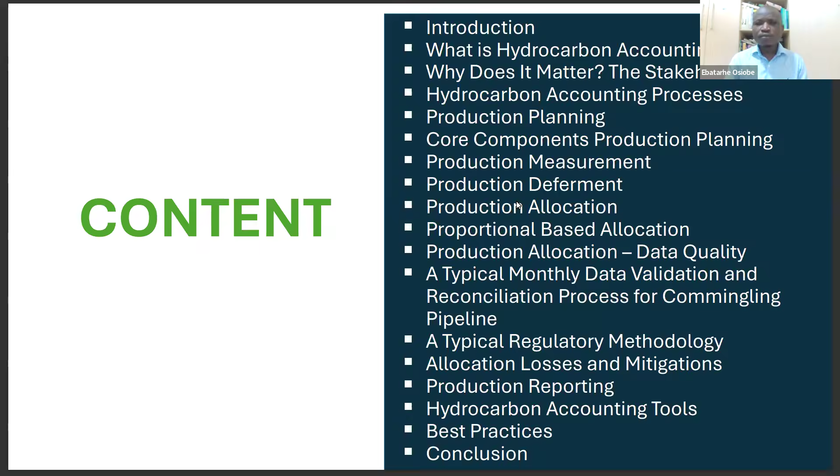So basically, when oil and gas has been drilled and the well is commissioned for production, the well flows through the flow line to a production facility where this oil and gas is processed. It could be two-phase separation or three-phase separation, but in this scenario, we have a three-phase separation. And the desired crude in this scenario flows through a pipeline and goes through a LACT unit, from which it can be trucked, or go to a pipeline that goes to a refinery, which is the midstream and downstream, and also to a trunk line to a terminal for exports.

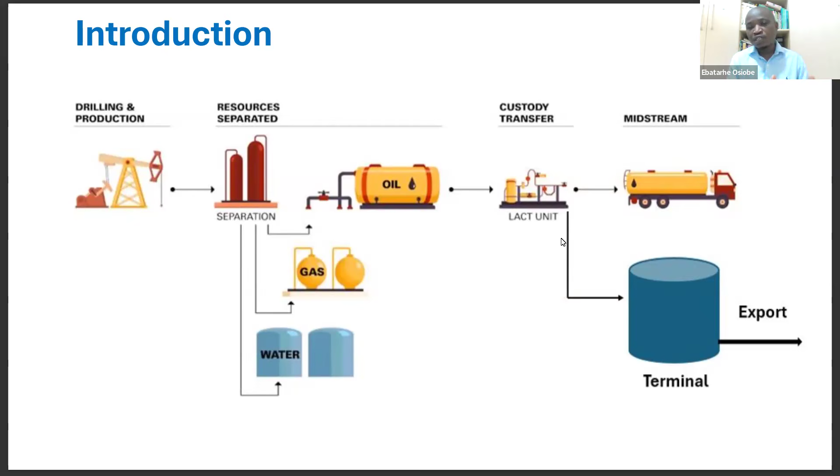And where hydrocarbon accounting comes in is in a commingling situation, where you have more than one operator producing into a particular pipeline or a trunk line. It becomes a complex scenario to know who owns what. And that's where hydrocarbon accounting is very important. So most of my discussion today will be based on a commingling process, because that's where hydrocarbon accounting becomes very complex, and measurement is very key in such a situation.

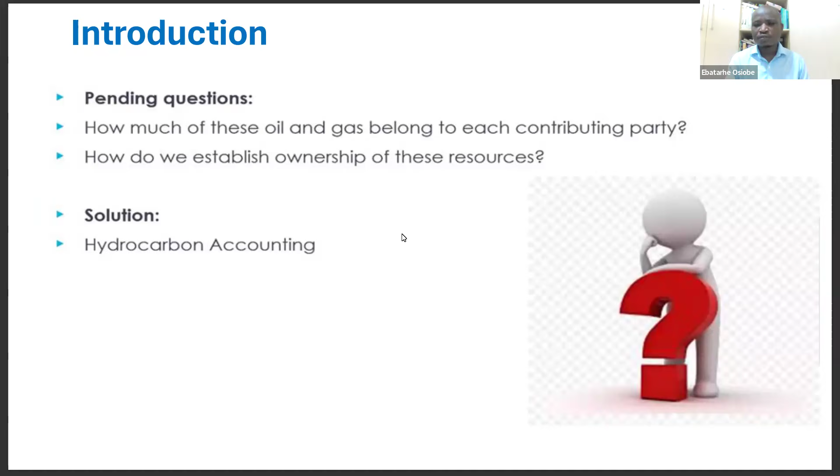So two questions every operator will ask themselves, and even the terminal operator, are how much of this oil and gas actually belongs to each of these contributing parties, and how do we establish the ownership of these resources? And the solution is simply hydrocarbon accounting. And what is hydrocarbon accounting? It is simply tracking oil and gas from the point of production to the point of sales. This is what ensures accurate reporting for revenue, taxation, and regulatory compliance.

And why does it matter? Because it sits at the intersection of legal, engineering, and finance. It comprises production allocation and production planning. It is the cash register of any oil and gas company. It involves reconciliation. It involves production data management and, as I mentioned before, the ownership of this hydrocarbon fluid. It involves tracking the oil and gas from the point of production to the point of sales, which is from your wellhead to your process facility, to the pipeline, to the LACT units, and also to the terminal.

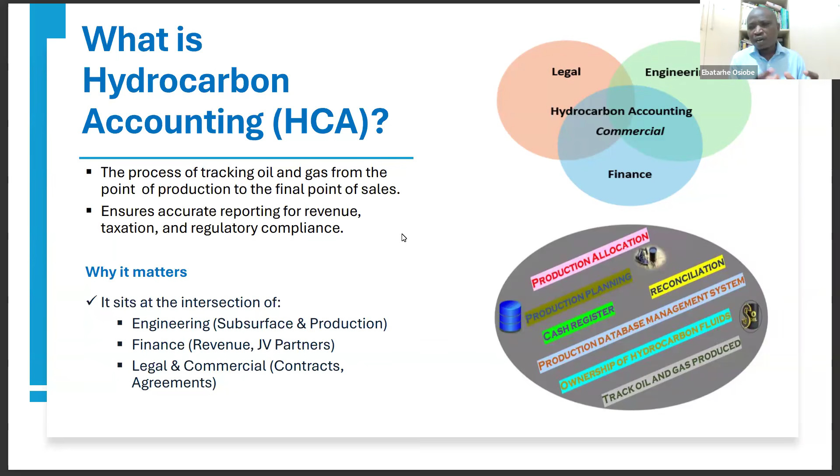In terms of engineering, we look at the subsurface and the surface, which is the production itself. In terms of finance, we look at revenue, JV partners, legal and commercial contracts and agreements, because when it comes to a commingling situation, there has to be alignment, there have to be agreements on certain contracts, your CHA and your CTA. So these are some of the things that make up hydrocarbon accounting, and why hydrocarbon accounting is very, very important.

Who are the stakeholders? Who really cares about getting these numbers right? Because hydrocarbon accounting is all about numbers. Why do we need to get these numbers right? The answer is everyone. The JV partners want to ensure correct revenue distribution between the different parties. The government and regulatory agencies, for royalty calculations, taxation, and production reporting. The investors and shareholders want to know the reserves and how to value the company in terms of financial transparency.

Then for the operator itself, which is the management of the company, for strategic decision making, you have to make informed decisions based on what you are producing, what you need to do and what you don't need to do. In terms of reserve estimation and production forecasting, it's from your hydrocarbon accounting that you can determine your production planning, and also carry out performance analysis. How are you performing? How is your reservoir performing?

How is your production performing? Are you metering well? Are your measurements good? Are there discrepancies in your measurements? What's your allocation? Is what you are producing actually what you are allocated, especially in a commingling situation where you have two or more operators injecting into a particular pipeline? And also for the pipeline and terminal operators, for scheduling, inventory management, and custody transfer.

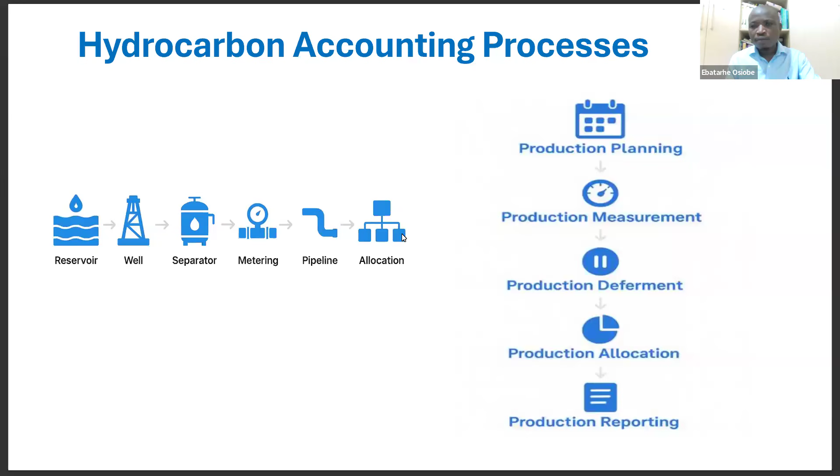When we talk about production planning, what's really production planning? It's the process of forecasting, scheduling, and optimizing oil and gas production to meet business objectives, contractual commitments, and regulatory requirements. Its key objective is to maximize efficiency and minimize downtime, because you need to plan what you want to produce and how you want to produce it. You need to ensure that your equipment uptime is top notch. You need to know when you need to shut down for maintenance, annual or quarterly maintenance. These are some of the things you do during your production planning.

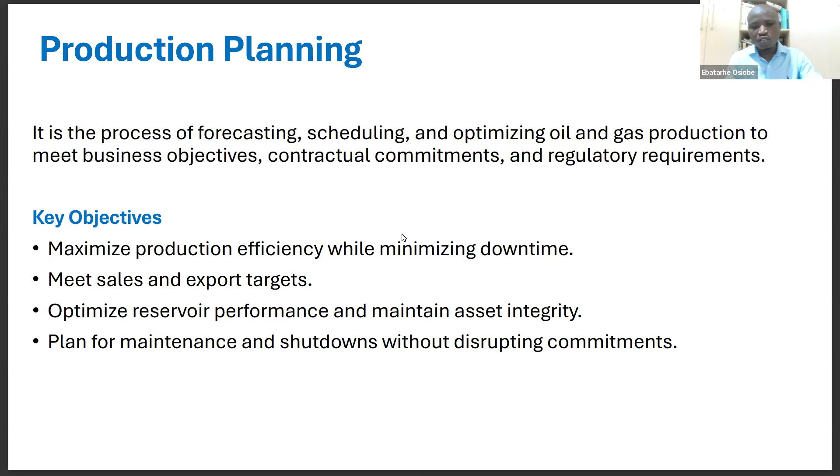And to meet sales and export targets, you have to plan. For example, you're given a target to produce 1 million barrels, and you have to plan how to produce that 1 million barrels efficiently without disrupting your production or your reservoir. You need to optimize your reservoir performance and maintain asset integrity. There's also a plan for maintenance, which I've mentioned, shutdowns without disrupting commitments.

What are the core components of production planning? We have forecasting, scheduling, resource allocation, risk management, and integration. On forecasting, you look at short-term and long-term production volume. You use your reservoir model and historical data to do your forecasting. For scheduling, you look at your daily and monthly production plan, and you have to align it with your pipeline availability and your storage. It all depends on your own production philosophy.

In terms of resource allocation, you look at the wells you are going to produce during that period. You look at your facility and the manpower that is going to operate this process facility. How do you optimize your operators, your separators, your compressors, your pipeline integrity to ensure that your pipeline is available to transport your crude from one point to another? In terms of risk management, you look at uncertainties, like the possible failures within that period of time, so you make a contingency plan to ensure that does not affect you.

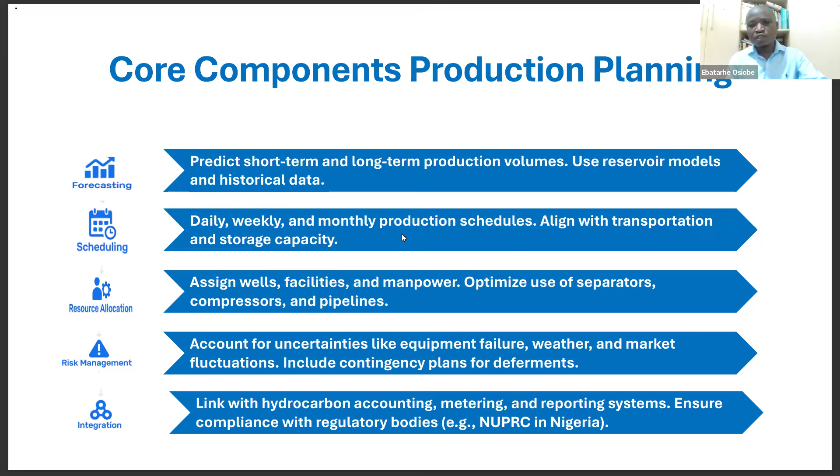In terms of integration, this is where hydrocarbon accounting comes in. The hydrocarbon accounting team comes in, planning your production, your metering, and your reporting to ensure that everything you do is in line with the regulatory body. I mentioned NUPRC here because I'm in Nigeria, and our upstream regulator is the NUPRC, Nigerian Upstream Petroleum Regulatory Commission. They are in charge of regulating the upstream industry in Nigeria.

But choosing your meter for your process facility entails proper study. You need to look at the maximum and minimum flow rate for that facility. You need to look at your fluid properties. Those are some of the things you look at to choose the particular meter and the right meter sizing that fits your production facility. Because if you don't do this study properly, when you start producing, there's a likelihood that you might not have accurate measurement, and you don't want that to happen to your production facility.

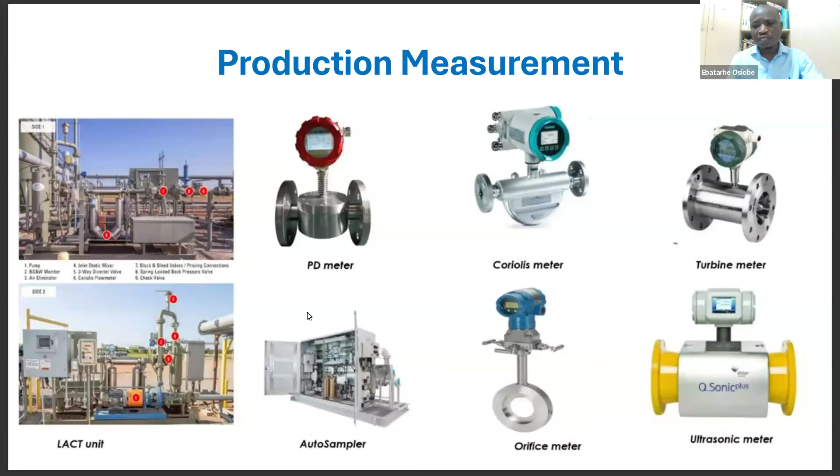Then let's look at what production deferment actually is. I'll just really say it is a reduction in production caused by an activity or breakdown, trip, equipment failure. It could be that your well stopped flowing at a particular time. It could be the breakdown of your pump. It could be the unavailability of your pipeline. That's what production deferment is all about.

In quick terms, you can say production deferment is your integrated production system capacity minus your actual production. Integrated production system capacity means what you can actually produce technically with the availability of all your wells and equipment in place. And when you don't actually produce that, if you subtract your production from your IPSC, you get your deferment, especially when your deferment data is accurate.

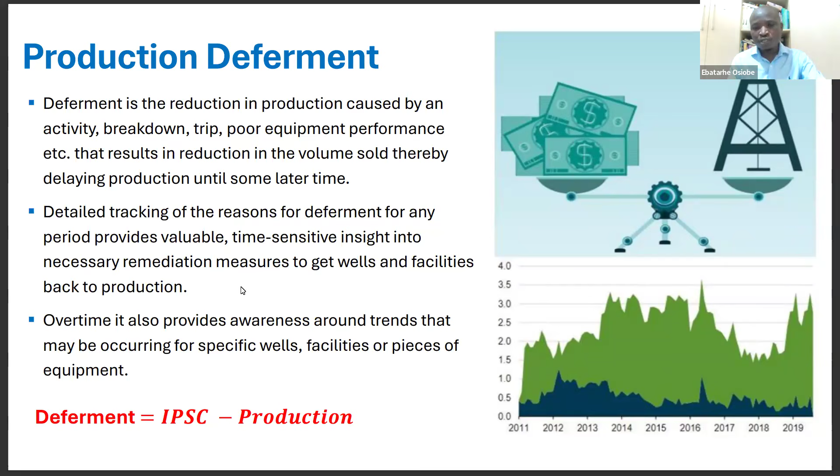So when we talk about production allocation, this is one of the core components in hydrocarbon accounting. Production allocation simply means redistributing the production back to the different contributors. Meaning when you have 1 or 2 producers into a pipeline, they commingle and they produce, and you need to give that production back to these individual producers. Also, allocating your production back to your various fields and your various reservoirs, which is called back allocation. It's just a counterflow process: what was received and what you are distributing back from the main source. That's simply what allocation is all about.

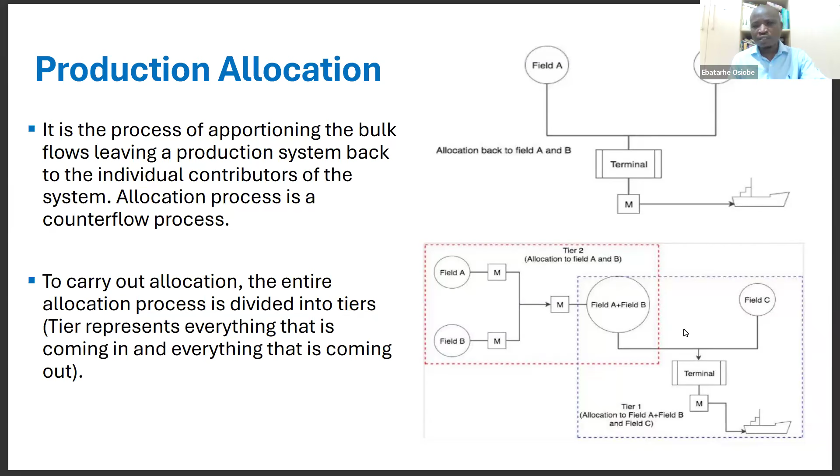In production allocation, we have the fiscal allocation and the field allocation. The fiscal allocation is basically the commercial side of it, while the field allocation has to do with allocation to fields and back allocation to the various wells and reservoirs. Fiscal allocation is apportioning volumes to individual contributor fields based on the agreed methodology. There are agreed methodologies and commercial agreements between each party, and this forms the basis for sales revenue to the owners of that particular field.

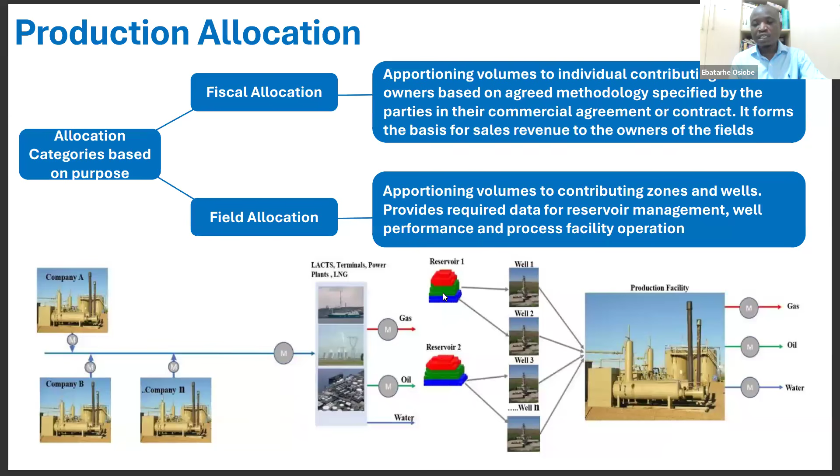The diagram below simply elaborates on what I just said. Here we have company A and company B flowing into a common meter. This is a LACT unit that goes to the terminal for export. On this other side, they have the production facility. Here we have the production meters. From here, it is allocated back to the individual wells and the individual reservoirs. This is basically what allocation is all about.

And we have different types of allocation, but I'll be focusing on proportional based allocation, because it is one of the most commonly used allocation methods in the oil and gas industry. Allocation by difference means when one or two producers are producing into a common pipeline and one has a metering system in place and the other doesn't. So the known volume is used to calculate the unknown volume. That's what allocation by difference is all about.

While equity-based allocation has to do with the equity share of a particular producer. So the allocation is based on the percentage equity they have in that particular asset. Like I mentioned before, proportional based allocation is what I defined in the other slide. And your uncertainty based allocation is based on uncertainty. It has to do with your metering system, your sampling system, your equipment and stuff like that.

This is a very good allocation method, but it has its own complexity, and that's one of the reasons it's not commonly used. It's used in some parts of the world, but it's not commonly used in the oil and gas industry. The common one is the proportional based allocation method.

This is a typical example of the proportional based allocation method. We have Q1 and Q2 flowing into a common metering system. This is our fiscal meter. This is our production meter, or you call it allocation meter. This becomes the reference point for the allocation to either stream 1, stream 2, and stream 3.

This is based on the proportional based allocation. Allocation is a conventional calculation method whereby, distributing the stream to the commingled production, or transportation systems receive shares of output quantity in proportion to their input contribution. So basically, that's what the proportional based allocation method is all about.

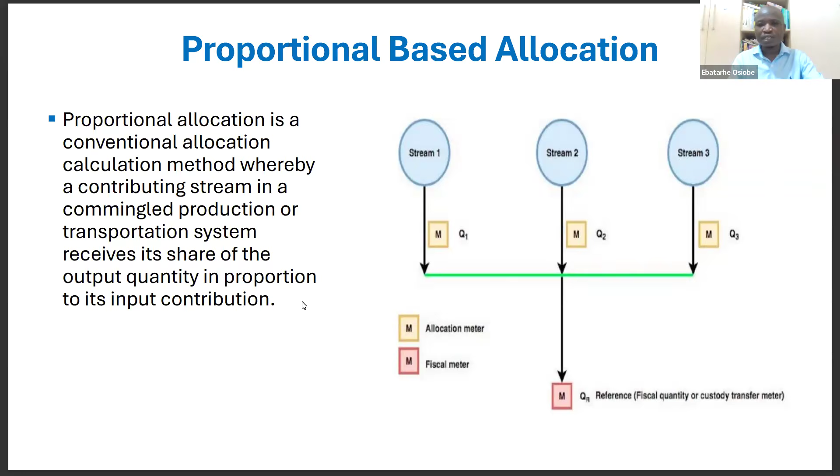Then I'll try to look at data quality for hydrocarbon accounting and allocation. Your data quality increases. The well measurement has the lowest accuracy because many of the companies opt for well test and measurement. They don't use the multi-phase meter or digital method to measure their well fluid. What they basically do is estimated well tests, which is the discontinuous well test method. So that volume is based on estimates.

So because of that, we have lowest accuracy in terms of well measurement, except you have a multi-phase meter for each of your wells to actually know exactly what your well is producing. Then for the station measurement, it's medium accuracy. When you move to the terminal, that's where you have the highest accuracy. But allocation actually takes place from the terminal export, which is the fiscal point of measurement.

So note that in hydrocarbon accounting, fiscal does not refer to measurement accuracy. It simply means that at this point, the value does not change during reconciliation. So this is what the data quality is all about.

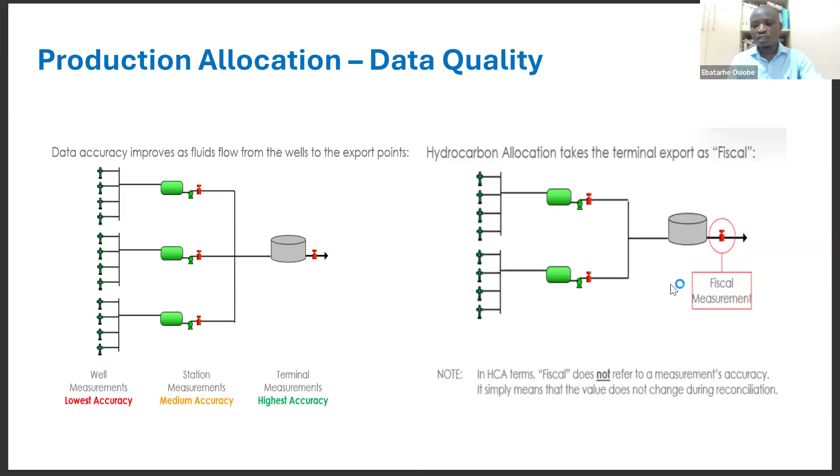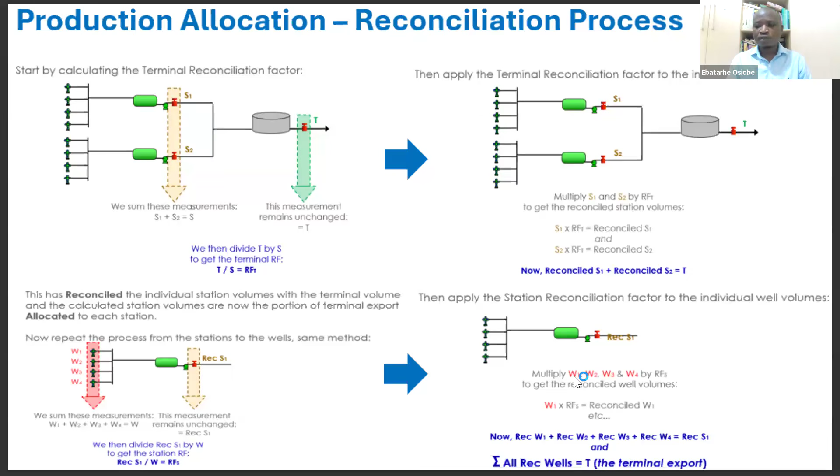And I think in the slides forward, I have a simple illustration of a mathematical calculation of the allocation method.

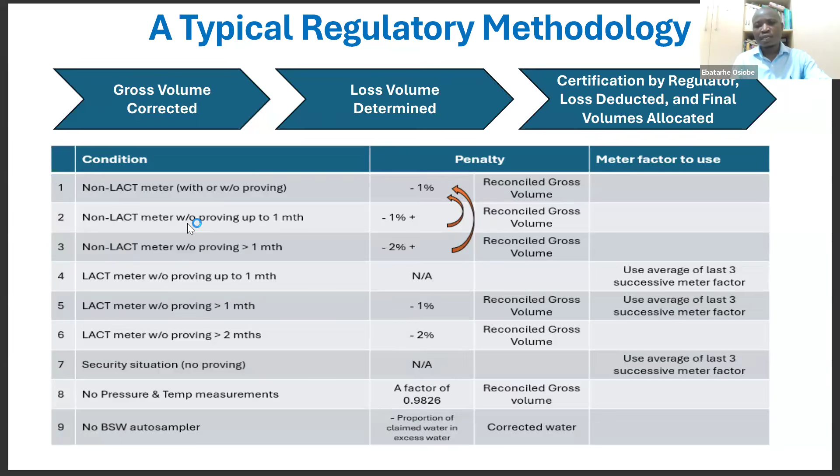So basically, this is what the methodology is. This is in line with the previous slide that is used to correct the volume in a commingling facility. There is a walkthrough for production allocation. In this scenario, we have the well production data and the facility production data. It's very simple. You can see that this is a LACT unit that goes to the terminal.

390 barrels were received, and if you come to company A and B, they actually produce to this LACT unit 350 barrels and 100 barrels. That's about 450 barrels. To start your allocation, you divide this volume by the claimed volume. You have a factor of about 0.866 which you apply to this volume.

There's actually a drop in what was received at the terminal, meaning that there was a loss on this pipeline. If you apply that factor on this, you get about 87 barrels, meaning that company B has actually lost about 13 barrels. If you apply the same factor to this 350, you get about 303 barrels.

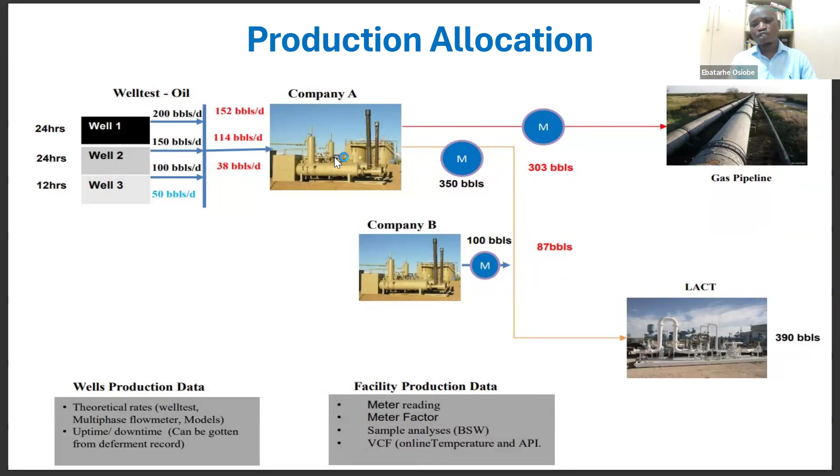Accurate measurement is very key when it comes to allocation, so that you have a good allocation factor. And what can cause allocation losses, and some of the mitigations? One is your metering accuracy, and also your water uplift, BS&W consistency due to lack of auto sampler, just as I mentioned the importance of the auto sampler in the previous slide. Metering accuracy and water uplift are within our control.

So we have a lot of things to do to make it right when it comes to metering accuracy and water cut measurement, and some of the long-term solutions to ensure representative terminal allocation. Because if you go back to the previous slide, you discover the allocation factor is around 87%, meaning there was a loss of 13% net volume on that particular pipeline.

So we need to ensure that pipeline is up and running smoothly, and regulatory agencies have to ensure pipeline integrity and security. There needs to be continuous monitoring and surveillance at all injection points. You have to monitor your production on a daily basis to ensure that every measurement that is being carried out, whether quality or quantity, is accurate and precise.

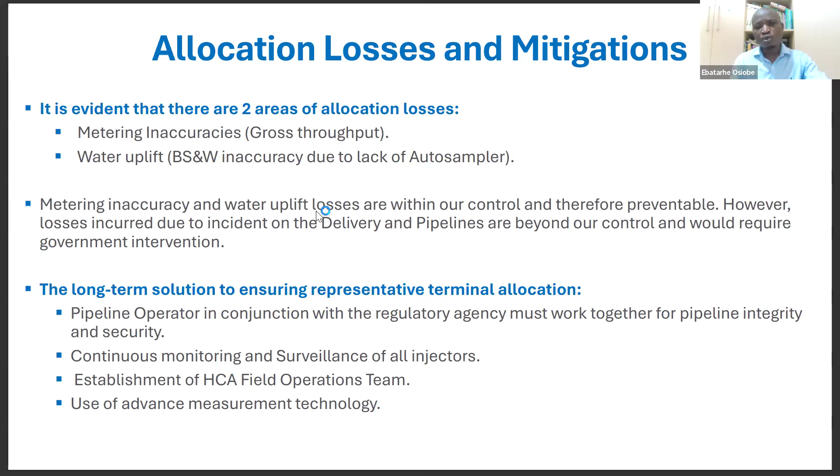There's also a need to advance measurement technology. Today we are talking about artificial intelligence, we are talking about VFM, digitalization. So there's a need to also advance your measurement system in your process facility to ensure that you can actually mitigate this loss, because if you don't have the right measurement equipment in your process facility, there's a likelihood that you're not going to measure right. And when you are flowing into an asset, it can introduce error into that system, and it becomes a very serious issue when it comes to hydrocarbon accounting.

So when we look at production reporting, these are just some of the reports that hydrocarbon accounting does daily and monthly in the oil and gas industry. We have the end of month production report. We have the reconciled and the fiscalized volume, which I've mentioned. We have the reports on gas production. If your facility is producing gas, we have the gas sales report. We have the monthly report on producing wells, which is the MRPW.

You have the end of month allocation analysis. You have to look at your allocation. How did you perform? What's your allocation factor? What went wrong, and what affected the allocation factor for that particular month? You have to look at this analysis so that you can improve in the months to come. Deferment report, greenhouse gas computation. This is very important in terms of environmental compliance and clean energy and stuff like that.

Loss analysis, just as I mentioned in the previous slide, where there were losses on the line, you need to look at the loss analysis. Where did this loss come from? Is it an issue of measurement? Is it an issue of pipeline loss due to any activities on the pipeline and stuff like that? Look at your well test reports, your stock volume, etc. There are so many of these reports.

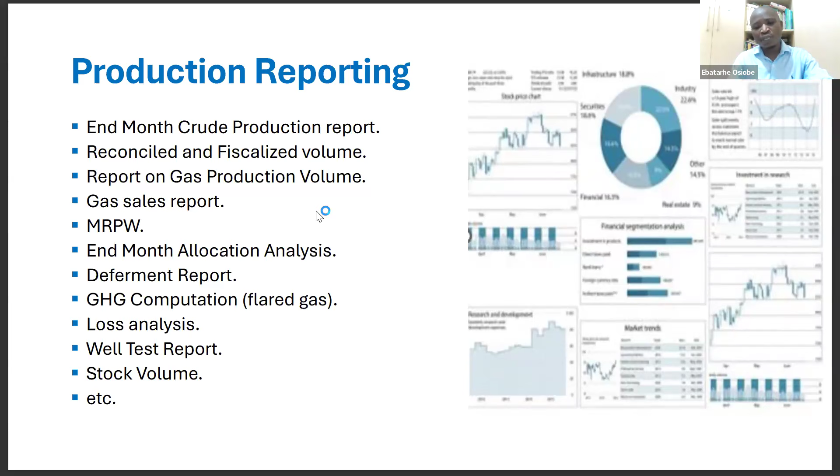It all depends on the asset, because hydrocarbon accounting is asset specific. Not all companies produce the same type of report when it comes to hydrocarbon accounting. So your reports in hydrocarbon accounting might be similar, but also different, all depending on the asset.

So when we talk about hydrocarbon accounting, some of the things I've been mentioning, the workflow, the process, some of these calculations, we use hydrocarbon accounting tools to do this calculation, estimation, and allocation process. This is good for data accuracy. They are very flexible, and in terms of integration, they can be integrated into your production if you have production software, and also in terms of compliance with the regulatory agencies.

Some of the common hydrocarbon accounting tools we have in the industry today: we have Energy Components, we have Axis, we have Avocet, we have P2 ProCount, and also the traditional Excel. If a company cannot afford to acquire some of these hydrocarbon accounting tools, it's also possible to use Excel, but it becomes very complex. How do you manage error, and how do you manage traceability while using Excel? So Excel can also introduce error into your hydrocarbon accounting figures, and data is very, very important, and you don't want to give the wrong data to your management.

They are good for accurate data capture. They can handle field, well, facility, your flow meter, your well test data, and your allocation. They can generate your regulatory reports, and some of the ones I've used meet international standards, because in hydrocarbon accounting we have both the internal and external reports you give to your regulators, even your JV partners.

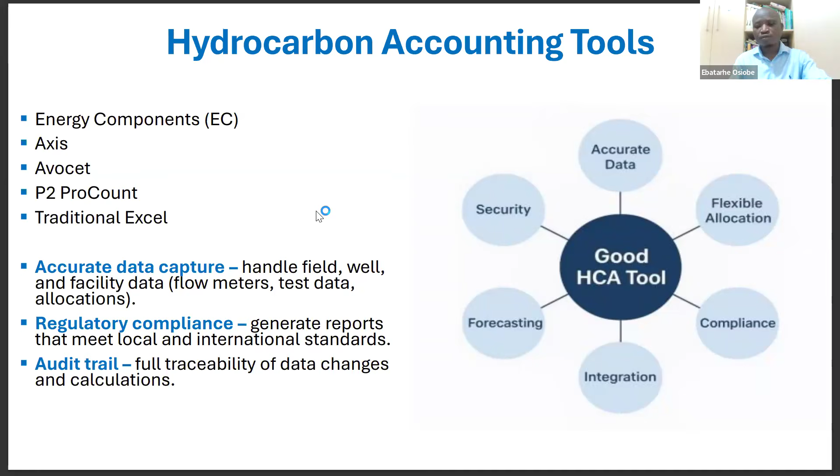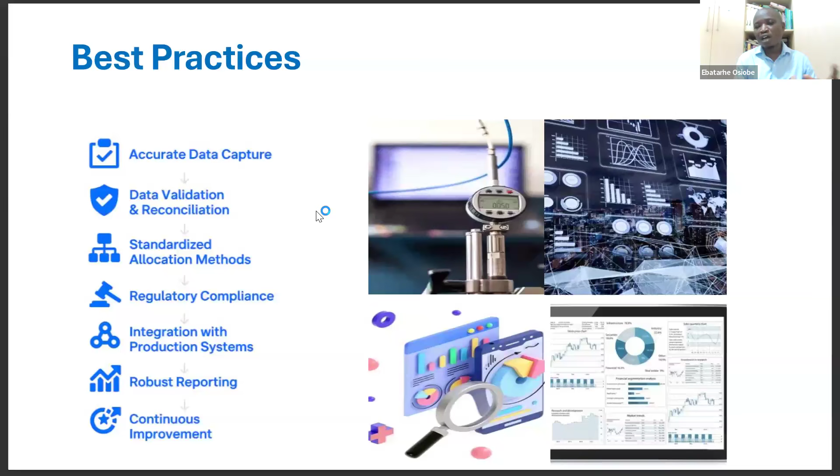So what are the best practices in hydrocarbon accounting? One is accurate data capture, because if you can't measure properly, you cannot actually account for it. So how do you capture your data? Is your data captured manually? Because manual capturing of data introduces error into your hydrocarbon accounting system. So you need to understand that you need to have a digital means of capturing your data.

Either you're using a DCS, a SCADA system, any form of digital tool to actually capture your data and link to your production and hydrocarbon accounting system, so that you are very sure of this data you are capturing, most especially when it comes to deferment, your well flow, your pressure, your temperature. You need to ensure that these data are captured accurately because they have impact in your hydrocarbon accounting system.

Data validation and reconciliation. I talked about the data workflow and validation we can do in our hydrocarbon accounting process. This is very, very important to ensure that figures are aligned and reconciled properly, and ensure that figures are actually correct, because hydrocarbon accounting is basically garbage in and garbage out. So it's what you put in, that's what you get. So you want to ensure that your data validation process is very, very important.

Then the methodology you are using for your allocation has to be top notch, has to be approved by a regulator to ensure that either you're not allocating less or you are allocating more to a producer. So your allocation process has to meet standard requirements and be tested that it is actually what it's supposed to be.

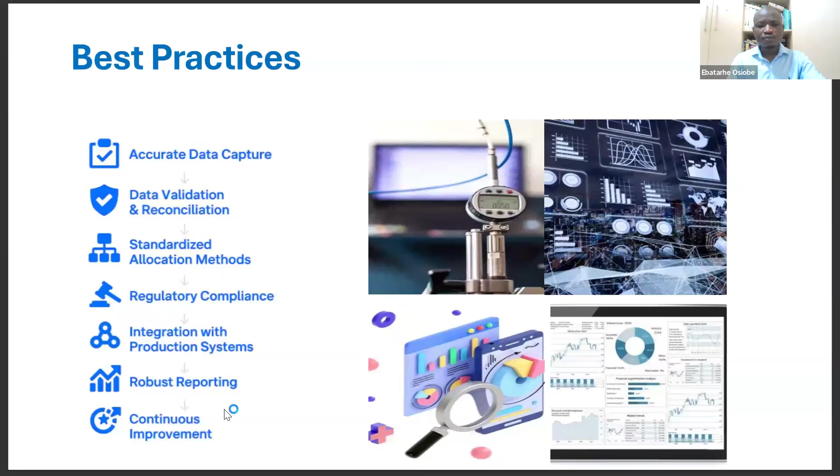So in conclusion, I would say hydrocarbon accounting is a critical business function, not just a technical exercise. It provides the foundation for operational decisions and financial settlement. So accuracy, transparency, and adherence to agreements are very, very important when it comes to hydrocarbon accounting.